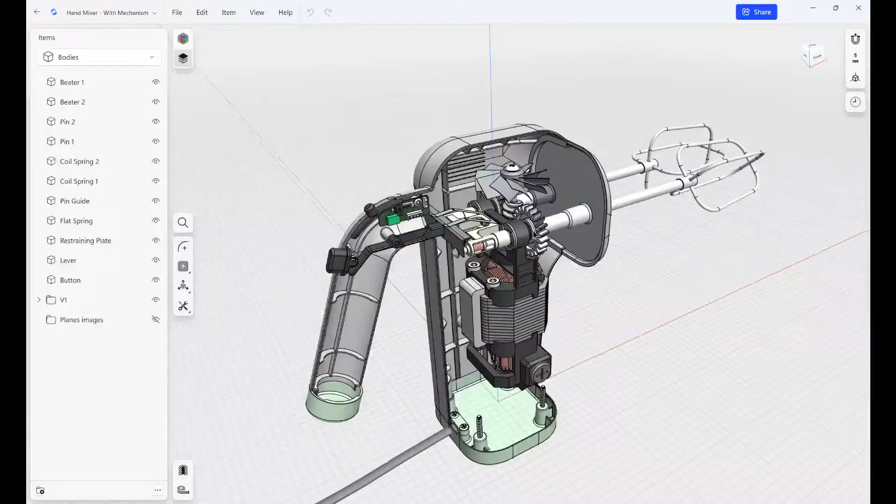So in order to clearly understand what we are doing while modeling, let's start by analyzing the mechanism that we want to create, so it's clear what we are aiming for. So let me just open the hand mixer with mechanism. Okay, here it is. So let's start with creating the section view.

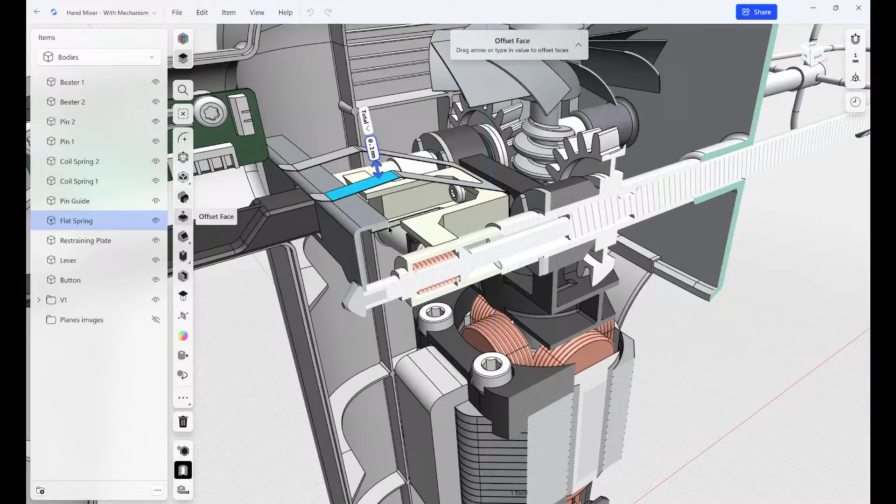Section view is a great feature when you want to inspect internals or when you want to edit something that is hidden by other geometries. So now we can see the internal parts of the mechanism. The parts that are important to us are beaters, pins, springs, pin guide, flat spring, restraining plate, lever, and button.

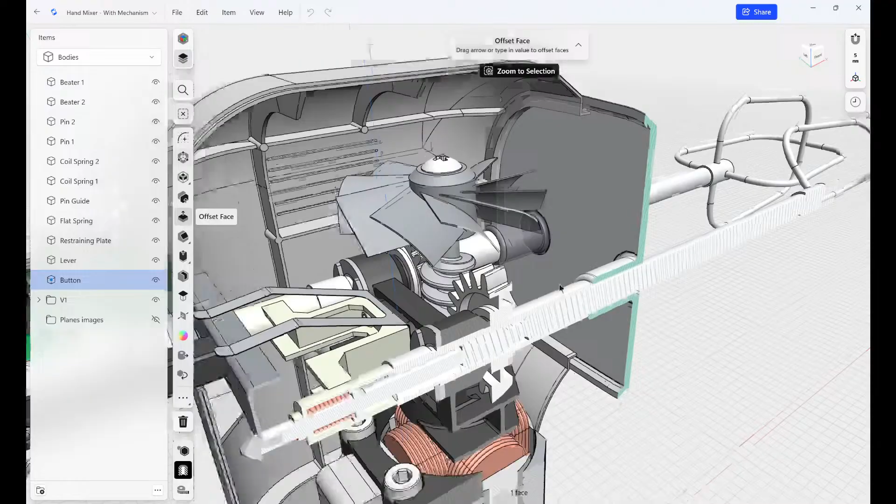And how this mechanism works: when we push the button, it will push the lever, and the lever rotates around the lever point. This will move the restraining plate upward, which will release the pins, and the springs will push the pins towards the right, towards the beaters, and this will push the beaters out. So this is the way this mechanism operates.

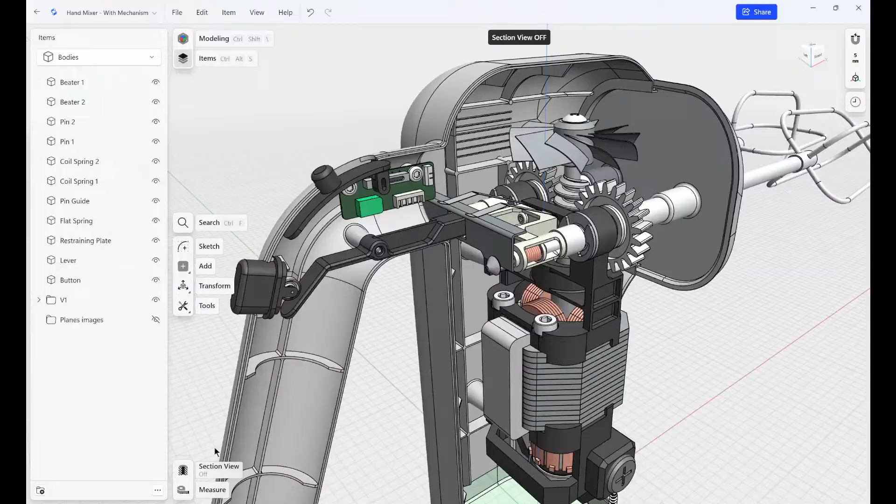And if we push beaters back in, this will push pins towards the left. Then, because of the conical ends, this will raise the restraining plate upward, and this will rotate the lever, and this will act also on the button. So now that we understand how this mechanism works, let's get to the model that is provided in the description, so we can start with the modeling.

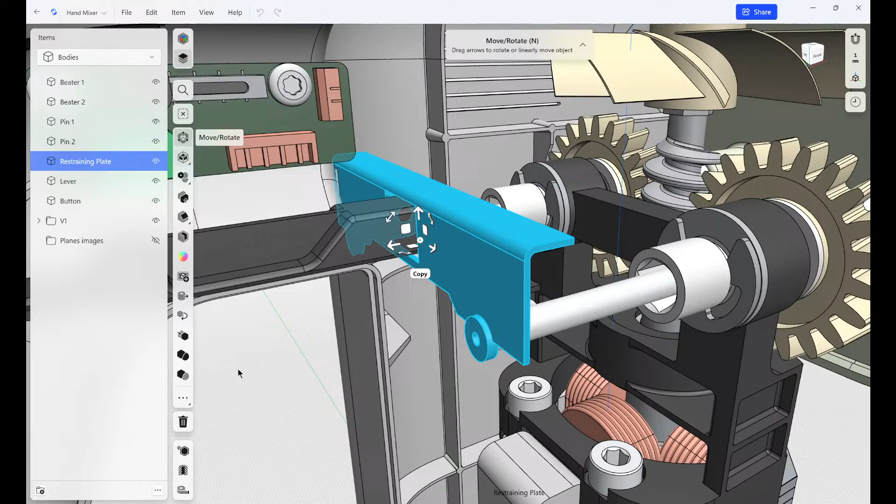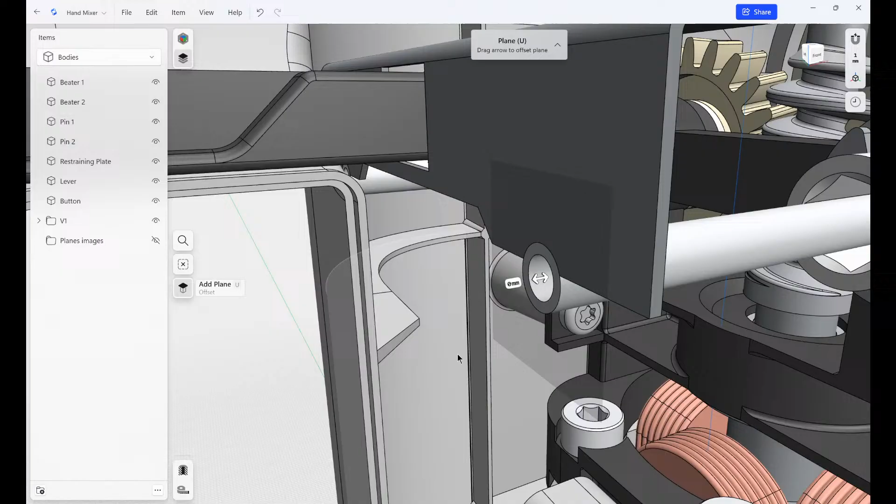Okay, and now we can also see that there are no conical ends, so we need to create them. Let's first create the plane, and let's rotate this plane by 90 degrees. Okay, now I can also create a section view, and I can start sketching on this plane. Let's create some reference lines. And then let's create the profile that we will later use to create conical ends.

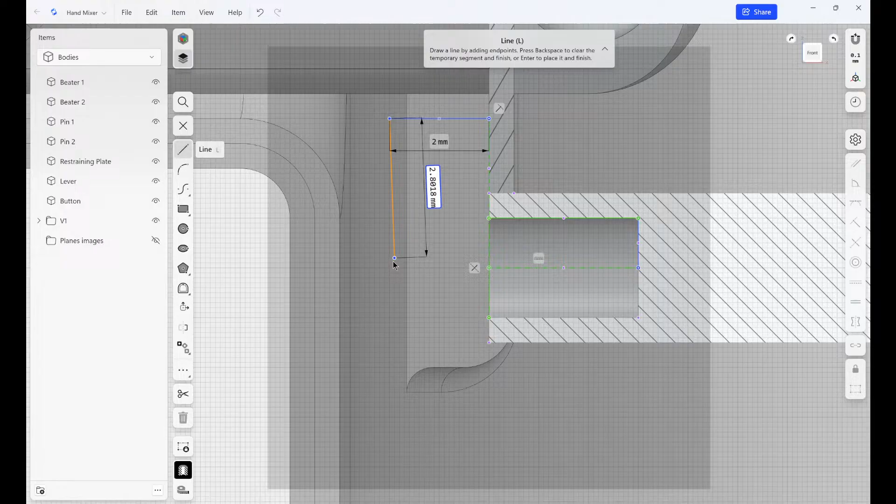With revolve we can easily create this end, and now with a simple feature and direct modeling we can just like that create the conical end. Okay.

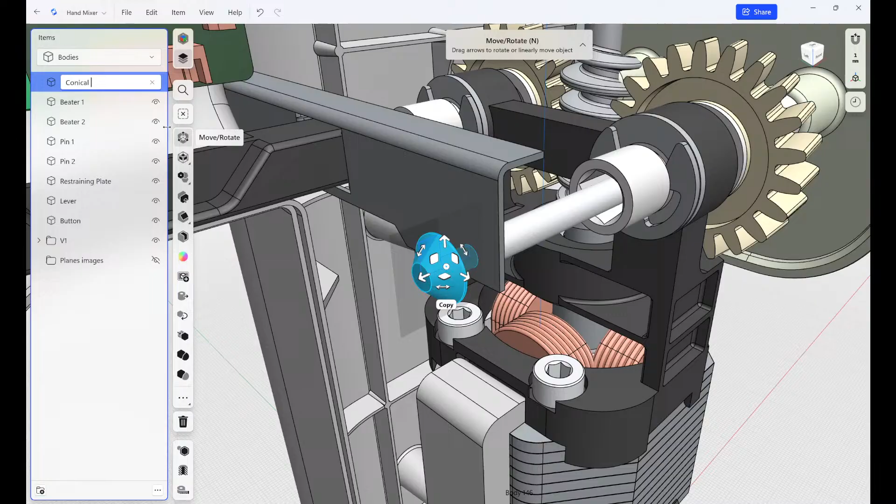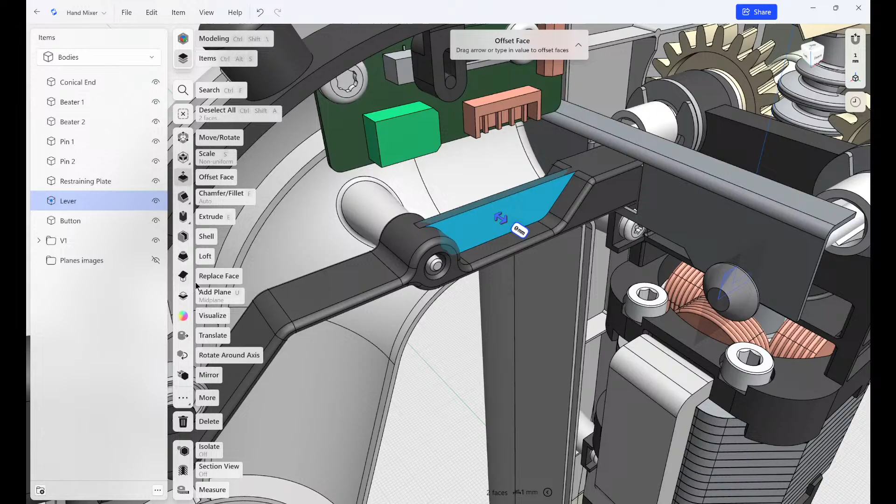Now I can do this also for the other pin, but in order to save some time I'll just use the mirror function and I'll mirror this new part around the middle plane and just like that easily create the copy of this. And for this, sorry about that, we will need to create the mid plane. Just select those two surfaces, add mid plane, and now we can mirror this part. Okay.

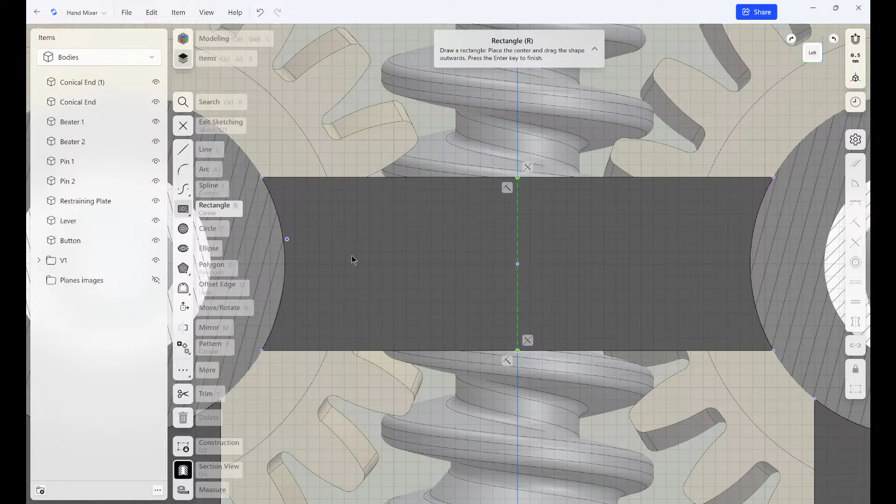Now let's prepare this part of the mixer for the pin guide, which we will create afterwards. So let's create a section view and start a sketch on this surface. Create a line for reference, make it construction, and create a rectangle from the center. Now I want to extrude this by 1 millimeter.

Now you can see that the part that we extruded is not visible, but we can easily fix this by just moving the section view a little bit. Now we can round those edges.

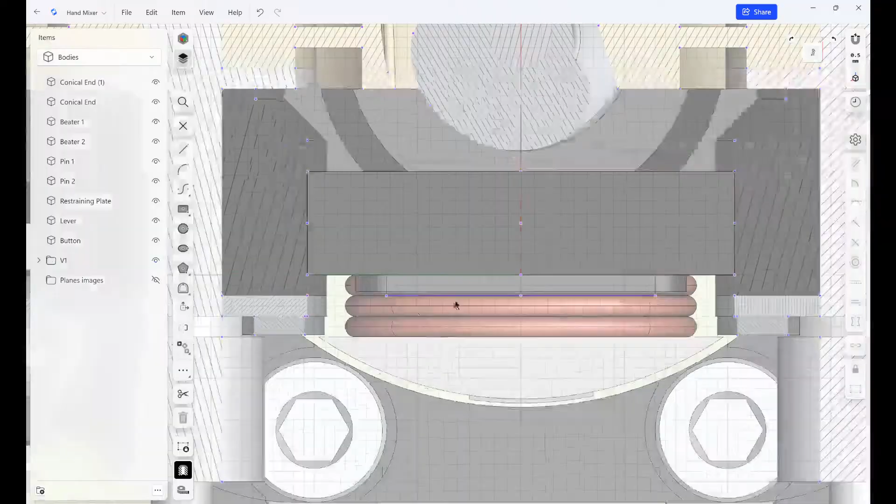And now let's start with designing the pin guide. I'll just project this edge as a reference, make it construction, and also I will create one reference here. And create the profile.

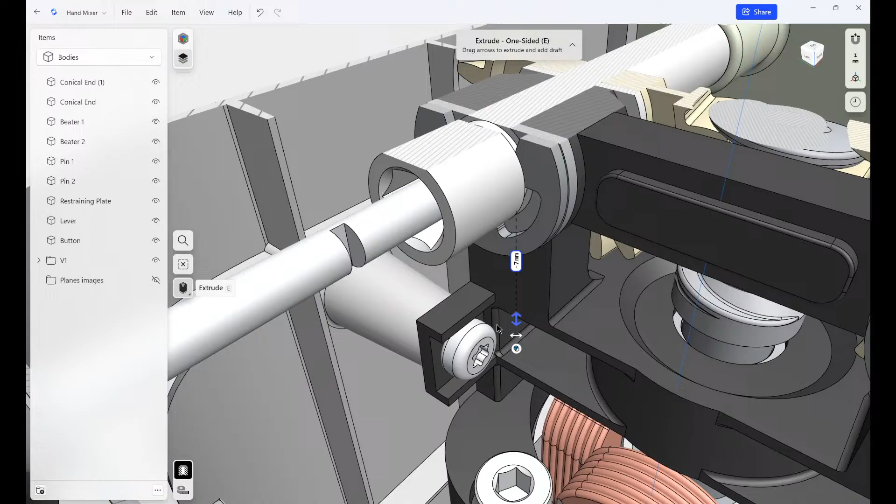Now we can use this profile to create a new part. Okay, I want to adjust it a little bit. Create another sketch.

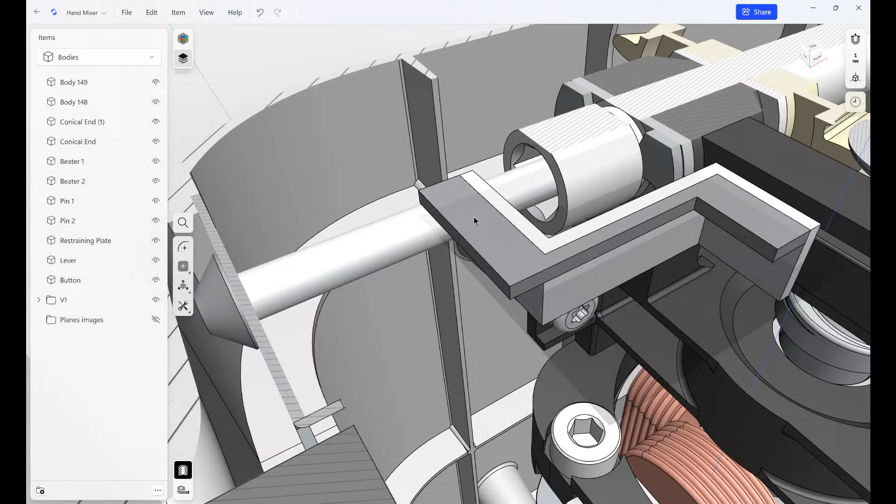And now I want again to mirror this body on the other side of the body we created at the beginning. To use this, the easiest way is to create again the midplane between those two faces, and now mirror this body around this plane. Okay, now we have three different bodies, so let's create one from them with union.

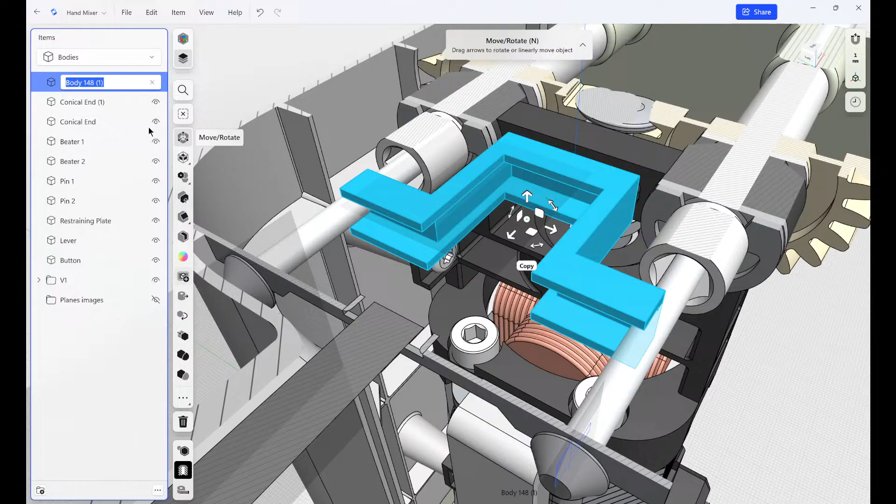Okay, and now because this part is symmetrical, again with mirror feature we can create the other side. Let's rename it. We can hide this plane so it does not obstruct the view.

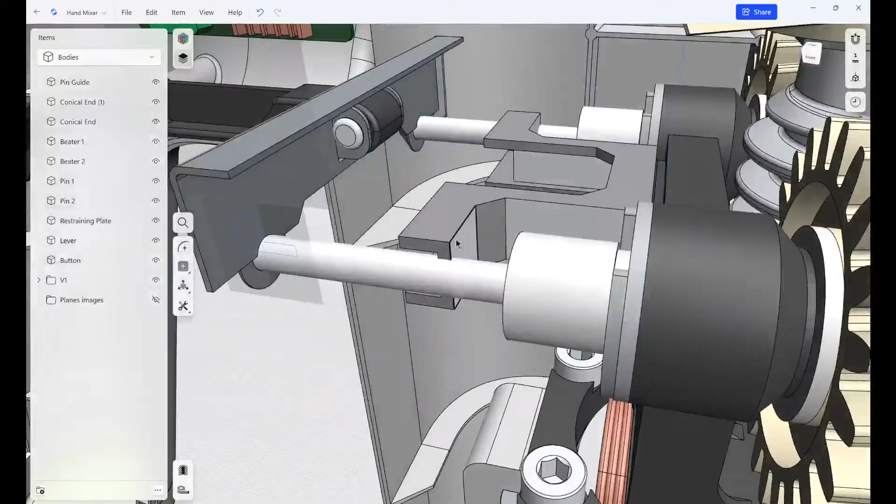Okay, next I will try to create another part of this pin guide. So we will create the section view here and start the sketch. Use the circle.

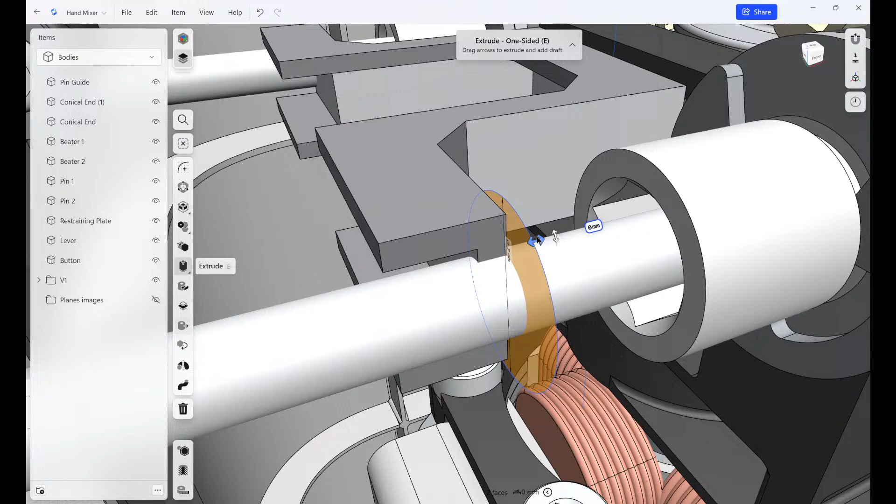Let's just measure what is the distance between those two faces. It's 5 millimeters, so I will extrude this by 5 millimeters, and I want it to be also the new body. Let's extrude it on the other side too. So the total length should be 14 millimeters. Now I want to project this face on this face.

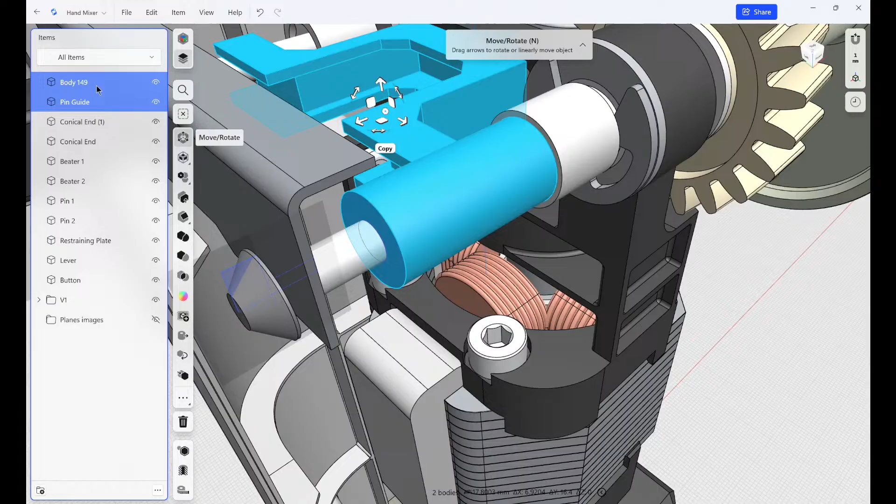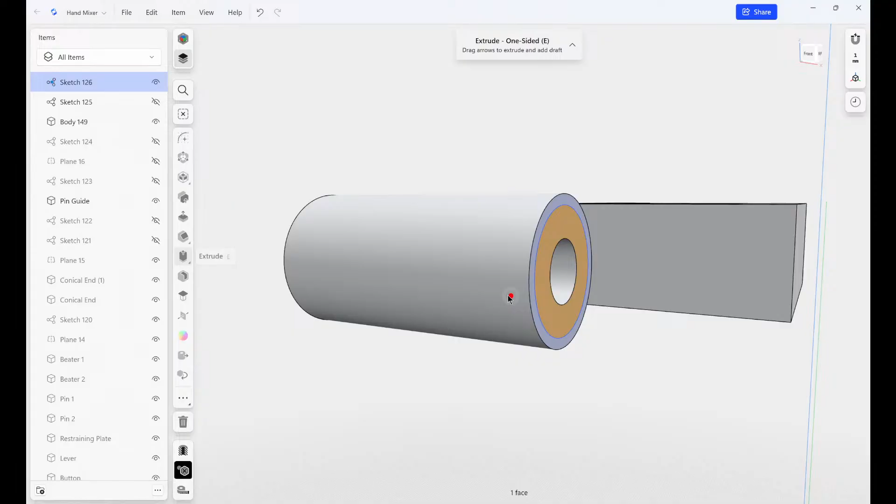Select the things I want to isolate and create the room for the pins. From the other side, I'll use offset edge to create this circle, and now let's just check. It's 14 millimeters. Let's extrude this by 13.5. Something similar we'll do on this side too.

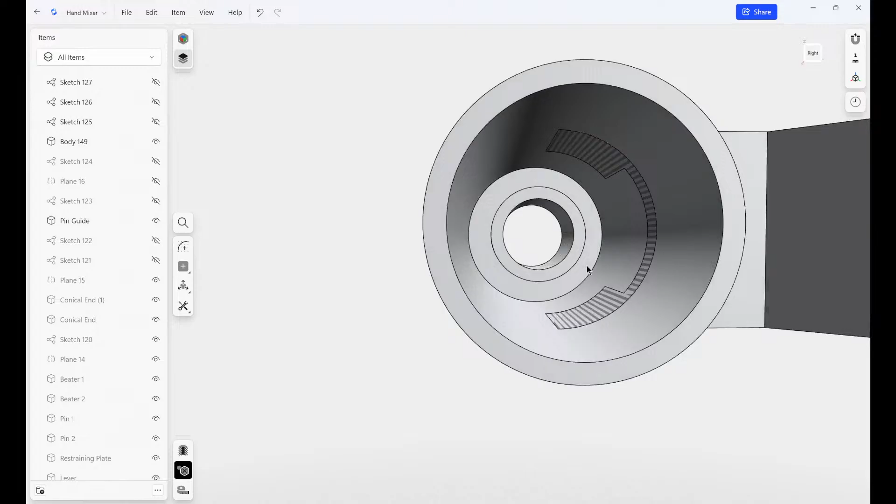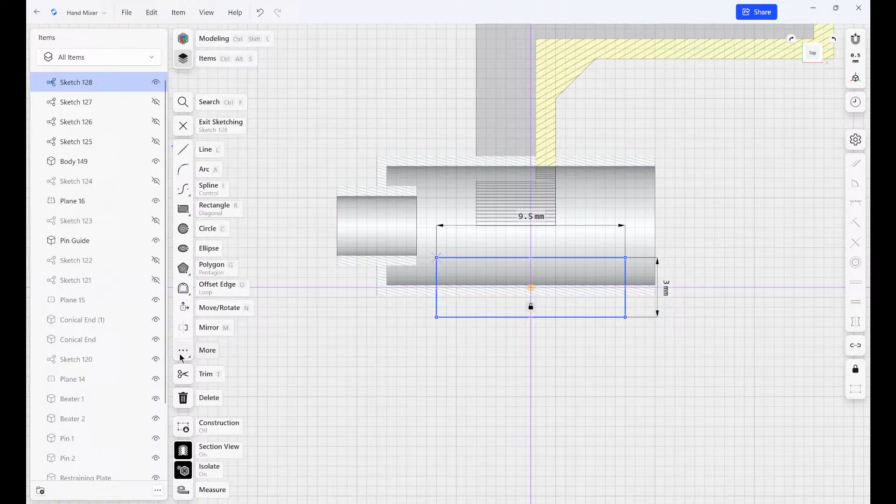And if we look at the other side, now we can see that we created a seat for the springs. Let's turn on the mid plane and turn on the section view. Now those are still two different parts. Now I want to create one rectangle on this, and we also need to create some reference lines so we can define the position of the rectangle.

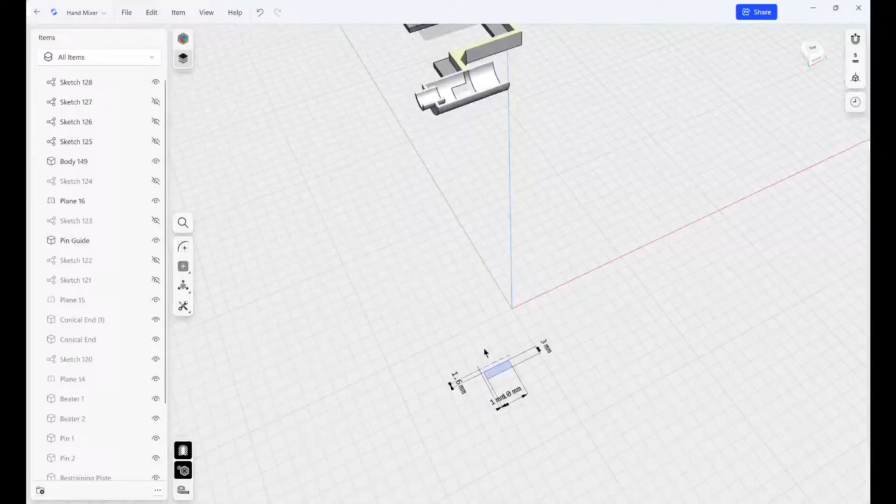Actually that happened by accident, so I accidentally picked the wrong plane to create the drawing, but if this happens, let's just use this trick and project this on this plane. And now we actually avoided creating this sketch again from scratch, and we will turn off the section view, select this projection, and

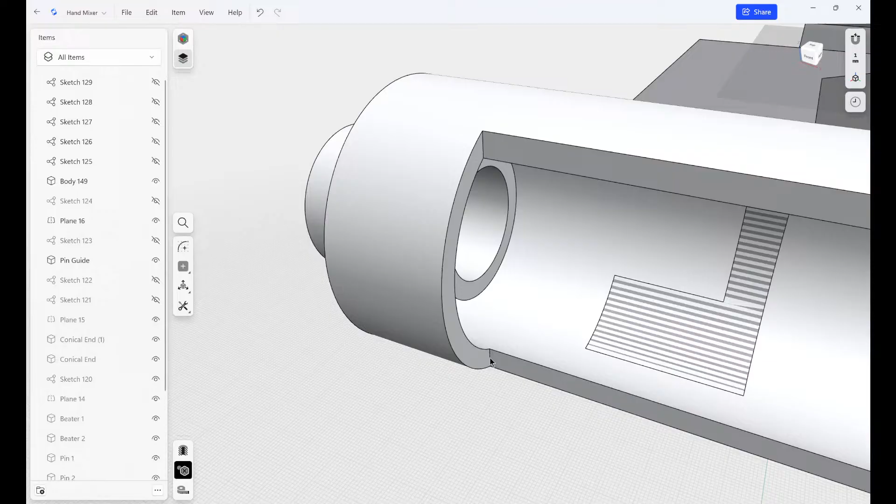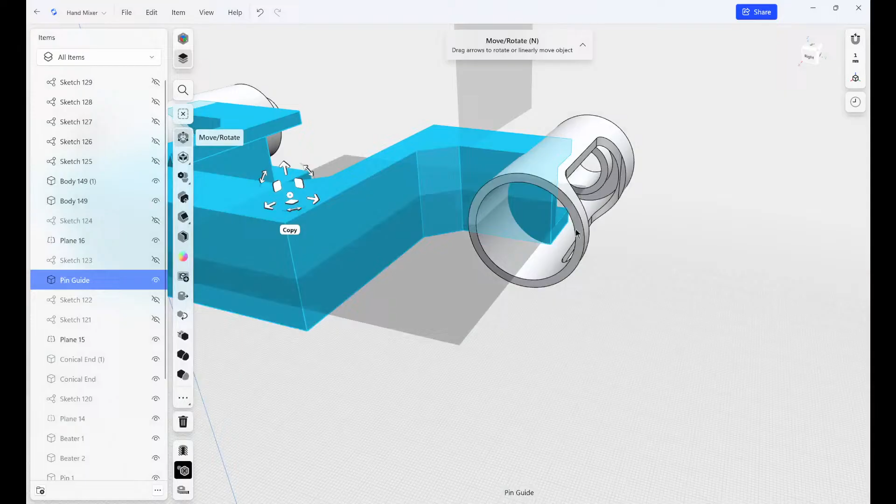okay, now let's round those edges a little bit. Okay, now let's turn on the middle plane that we will use to mirror this body. Okay, and when we look inside this body, we can see that we have something that we should not. So we want to delete this part, but if we delete this part, we will delete this whole body. So we want to divide this body in two different bodies.

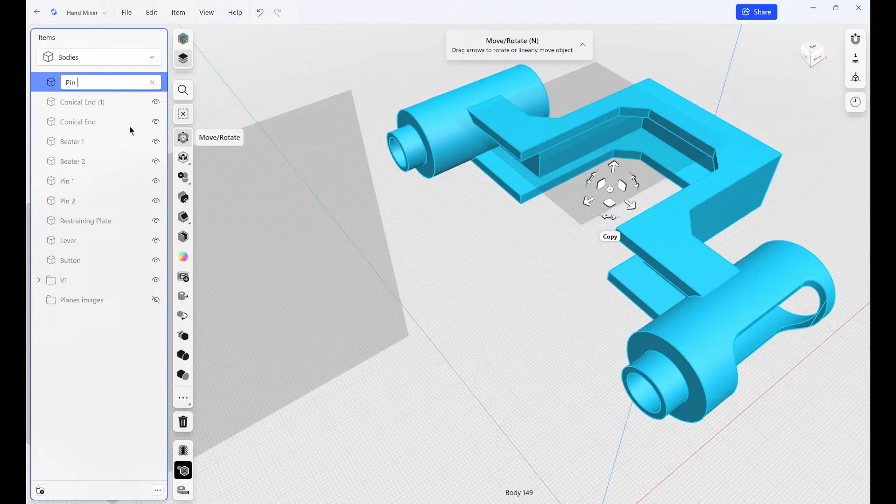So let's select this one and use subtract. And now we also want to keep removed bodies. In this case, remove body because it's only one. And now we can delete this part. And this is our pin guide. Make it one part or one body. Now we can look at the mixer as a whole.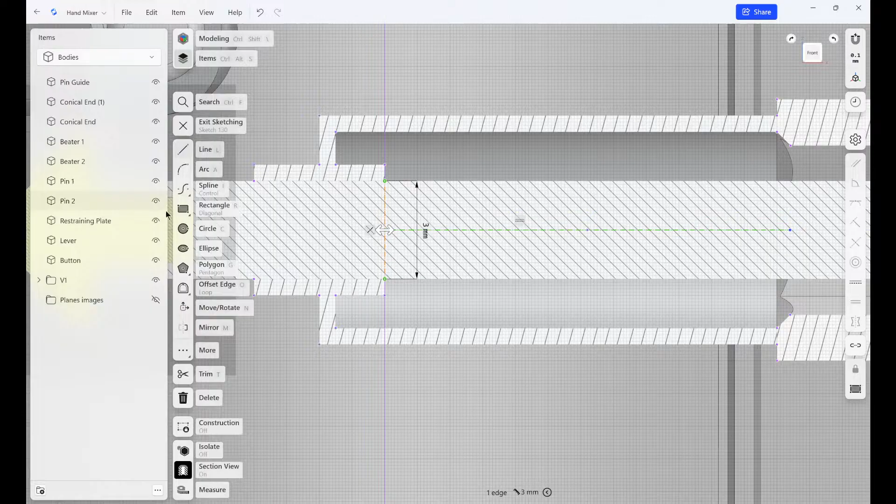Okay, now we need to create springs, coil springs. We will again use this plane, create section view, start sketch, create some reference, and start by creating the circle. Define its position.

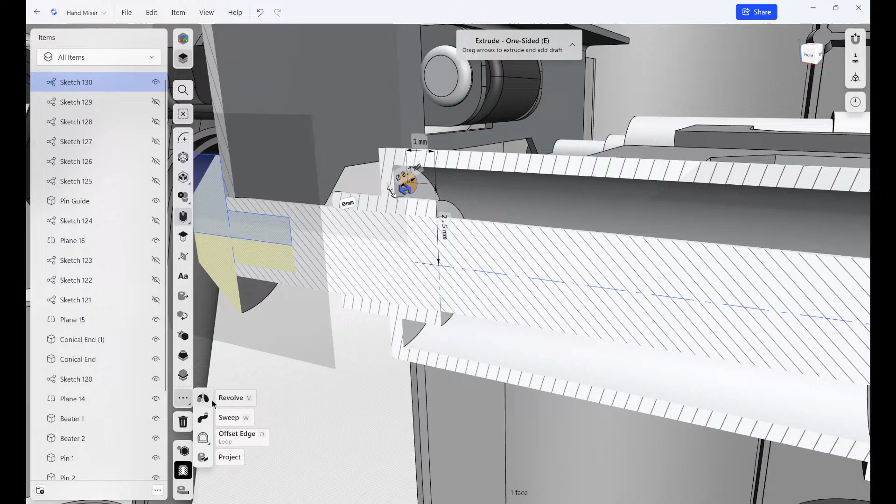And with revolve, we can easily create the spring just like that, and that was easy. Click OK. Now we can go back to the sketch. We will use the same sketch to create another body.

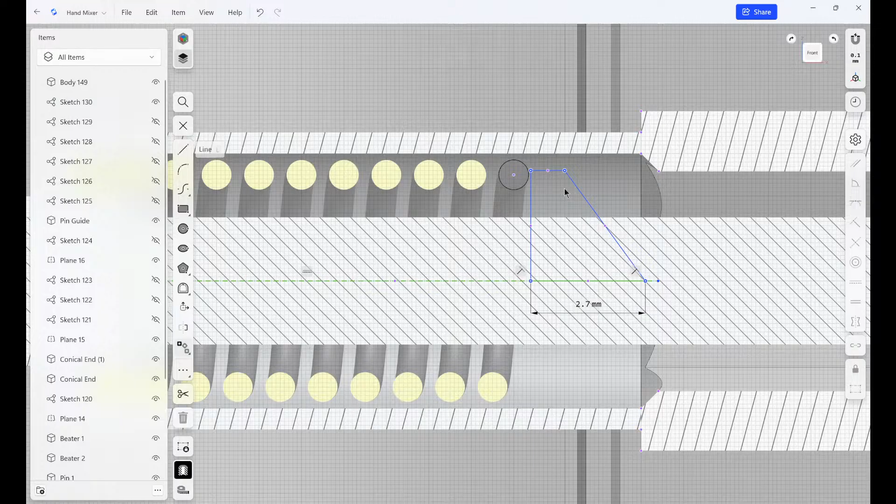Let's make this horizontal, this too, change this to 2.7 and set this angle to 125. Okay, now we can use this profile to rotate it around this axis, and we have another body. Now I want this to be part of the pin, so I'll select both of them and perform union, and now this assembly is done.

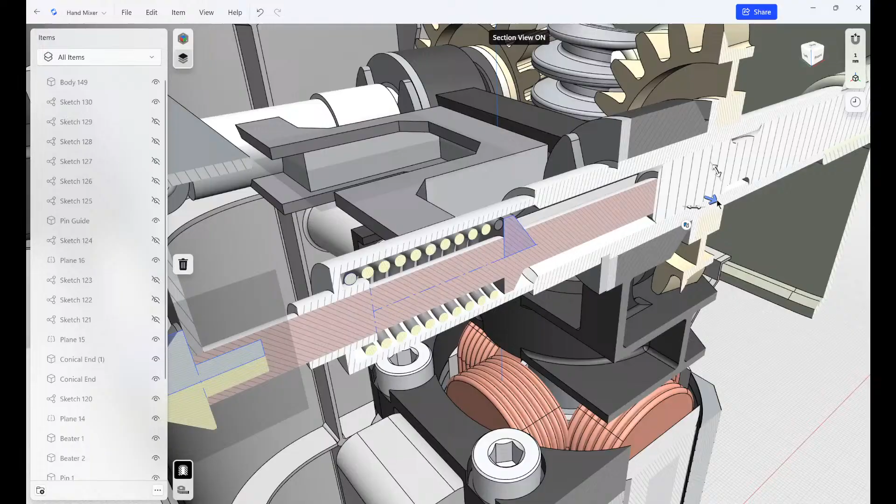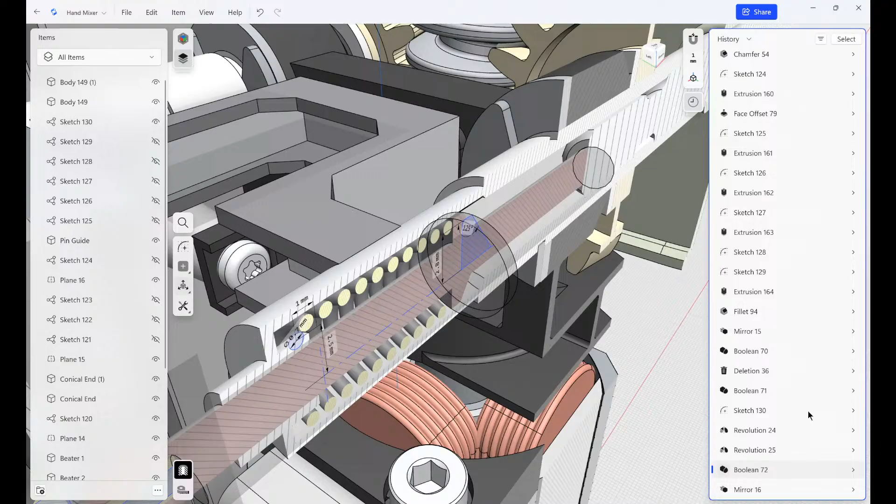But if we want to do this on another pin too, we can easily mirror this spring, and also now I would like to mirror this part, but I already joined it to the pin, so I'll use design history to suppress this feature. Now I can mirror it, press OK, and let's see if this will work.

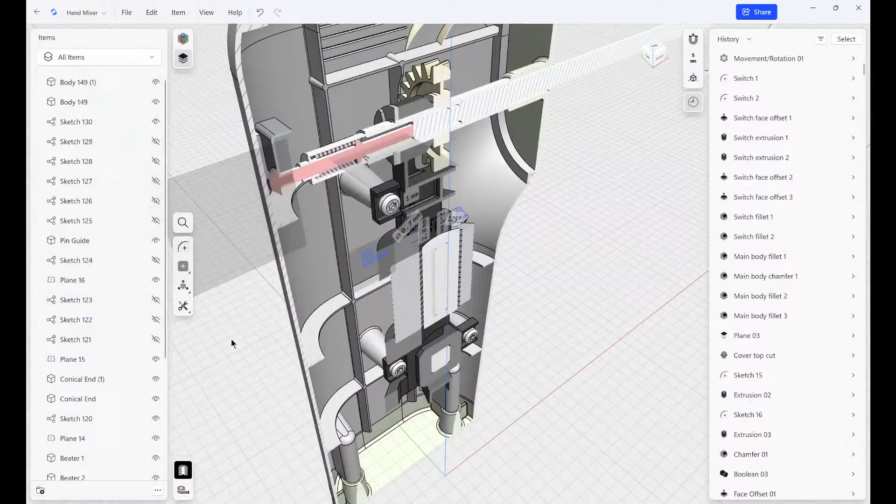And now we have again the one body, and let's see what we have on the other side. We also have this part here, so this was successful, and this is actually almost the whole mechanism. The only thing that I forgot is that I need here a place to insert the flat spring, but I can create space for it very easily.

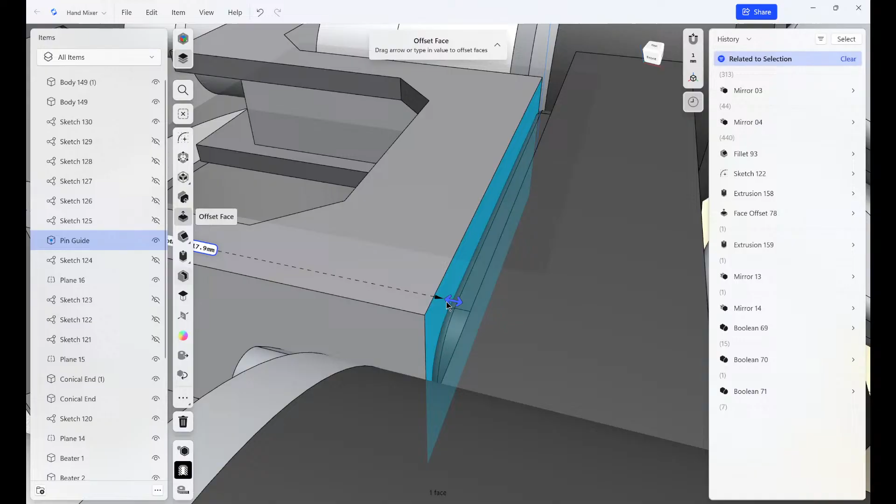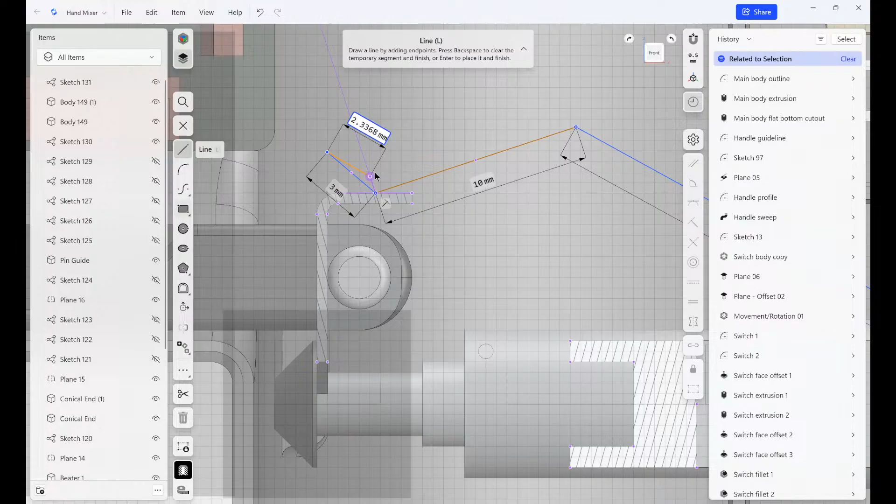I will just select those faces and move them by 0.2 millimeters. Like that. And now let me create a section view here and start sketch. And let's create a profile for the flat spring. We will also need here a reference. Let's define some angles.

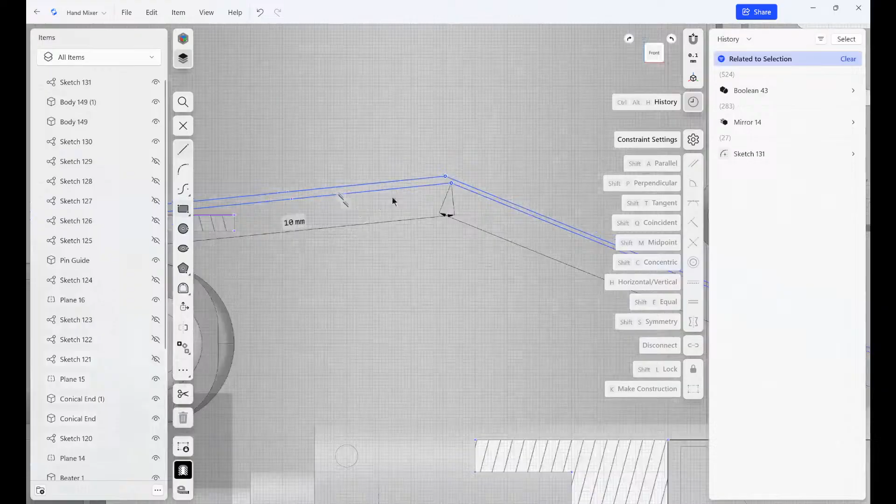All of those lines should be parallel. Okay, now they are. Let's just define distance between them. And there we go. Now we can use this profile to create the spring.

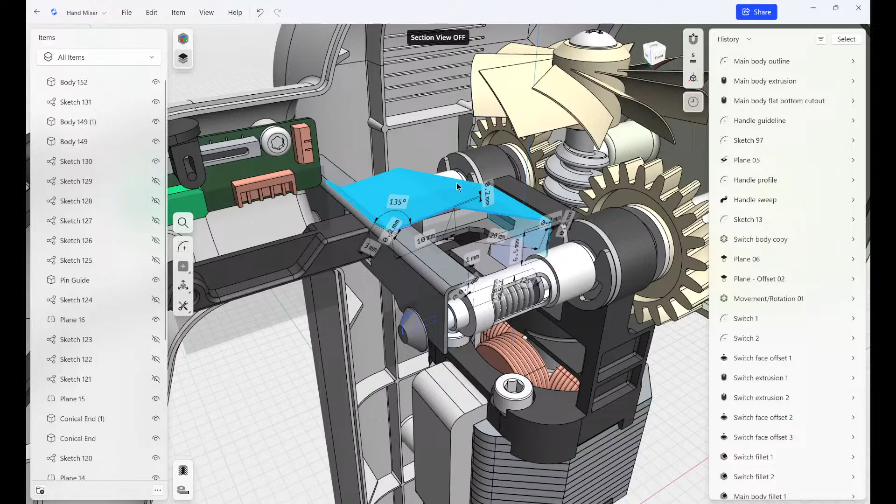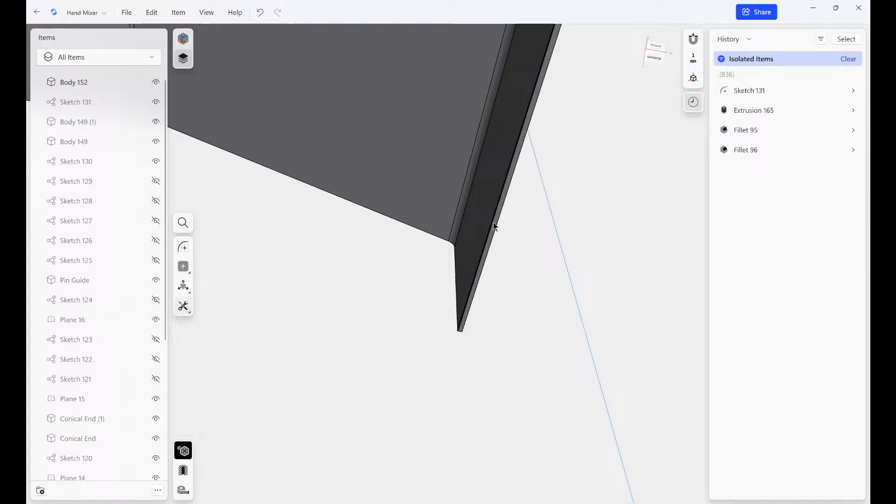And we need to do some adjustments on the spring. We need to round these edges. Keep in mind that those edges are on the outside, so we will use 0.7, but now the inside edges we will use 0.5 because of the thickness of the spring. Okay, and we need one more detail.

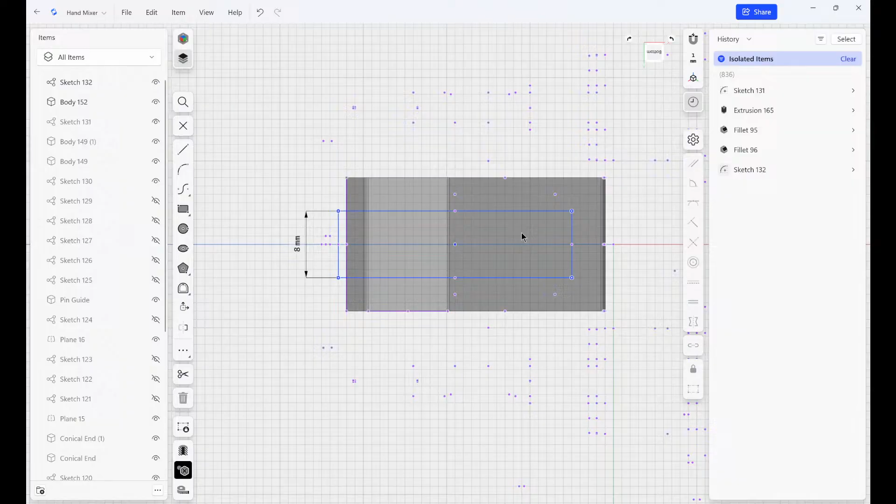We also need some references to define the position of rectangle. And now let's just round these corners.

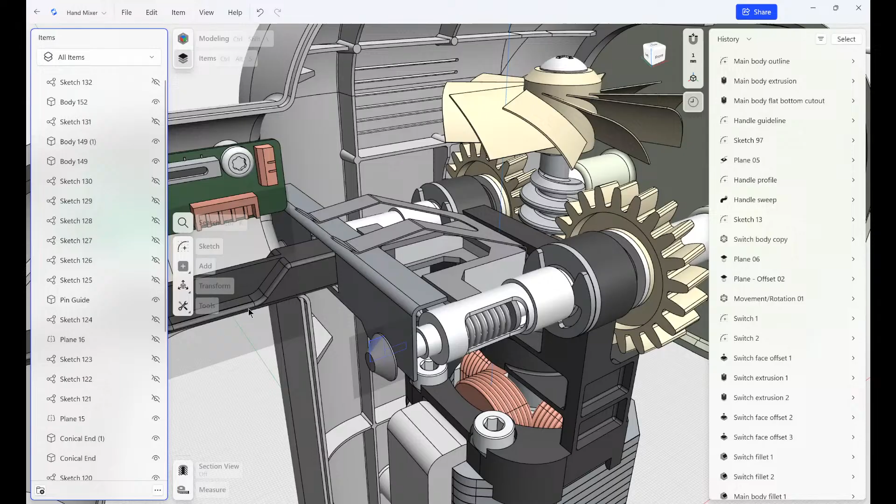And our mechanism is done. Let's just hide those parts that we don't need, not parts but the items, like sketches and planes also. Okay, so here is our mechanism, and now when we are done with modeling, we can start with drawing, creating a technical documentation from this body.

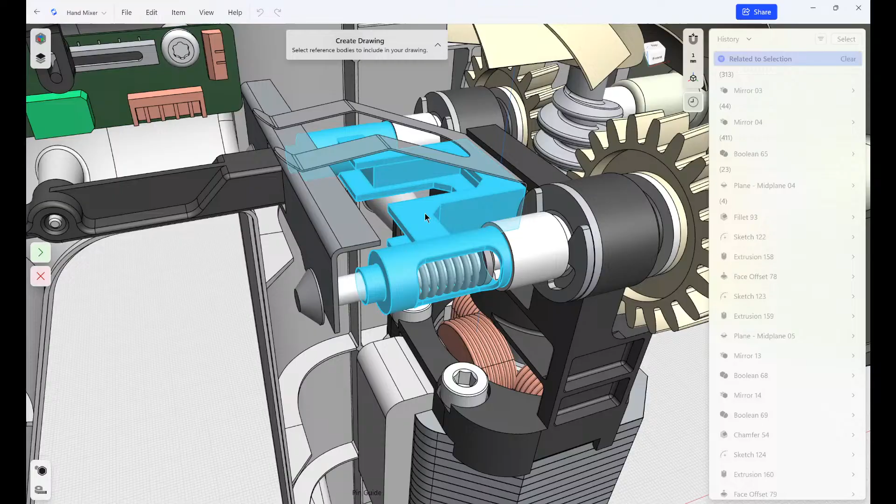So how will we do it? We'll go to this side and we'll just click create drawing. We will pick the body that we want to create drawing for. This is the pin guide. We will click next, and here we can define some preferences. I will choose the portrait orientation, A4 paper, and let's set the scale and continue.

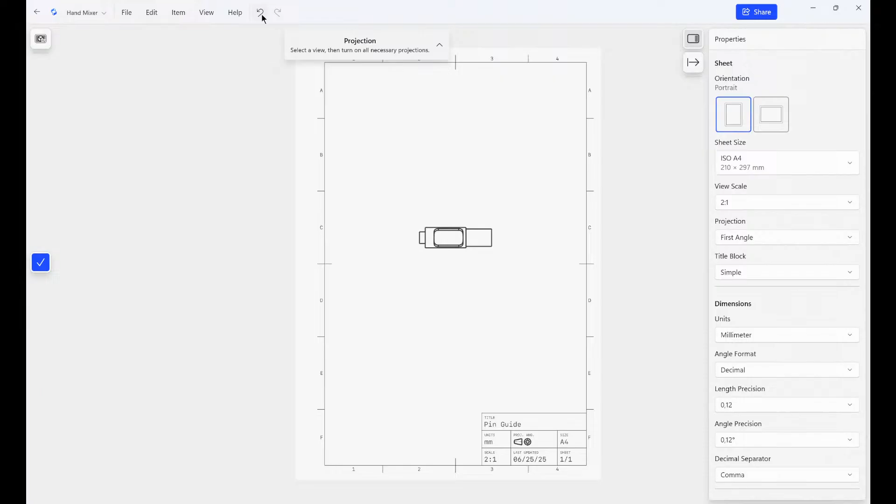And now Shapr3D will suggest you some of the views, but in some cases those views are not something that you are looking for, and if this happens to you, then, sorry about that, then you can click on this option here, front, and now I have also the custom base view option. I will click on custom base view option, and I will just rotate my part, my body, the way I want it to be projected on the paper.

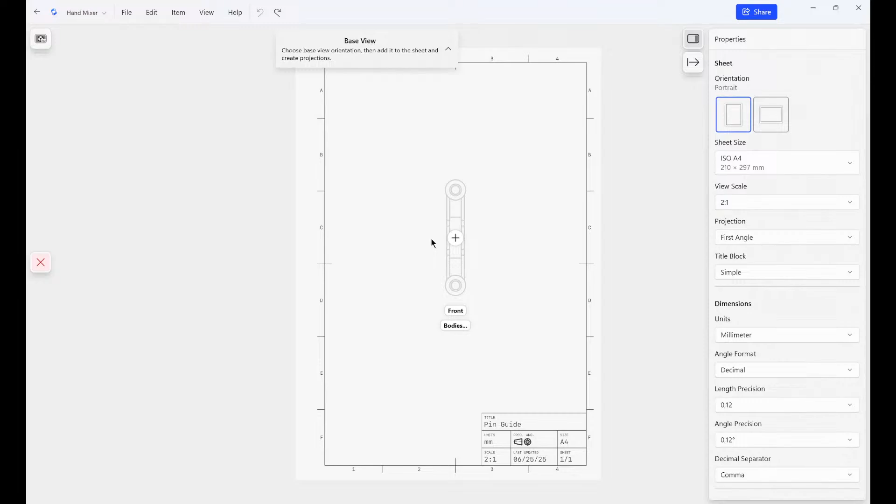So this is the projection I want to be my base view, and here it is. Now from this one I can create another projection, and we can also create isometric projection, so it's easier that way for us to look at which dimensions we are defining. I just want it to be third angle like that, and those three are the three I will go with for now.

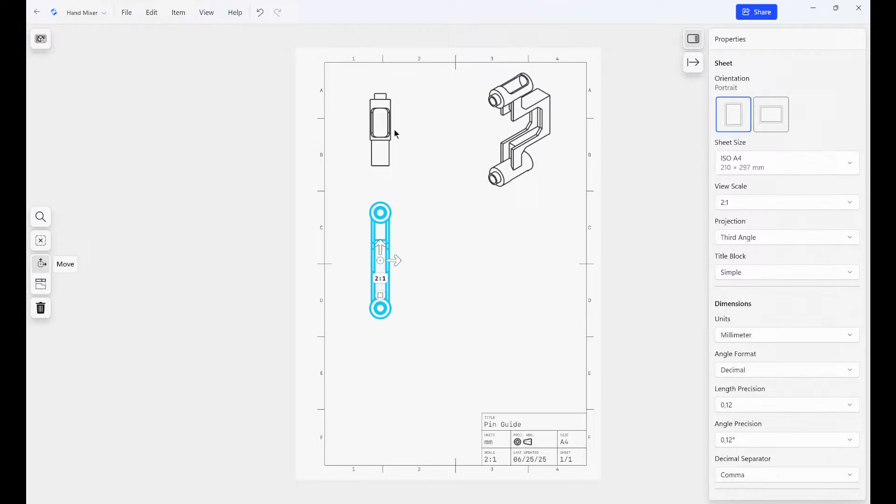You can very easily position them on the paper, but in order to fully define this part, we will also need some section views. We can go to views, select section view, and now create section view. And we will need another section view. This is like that.

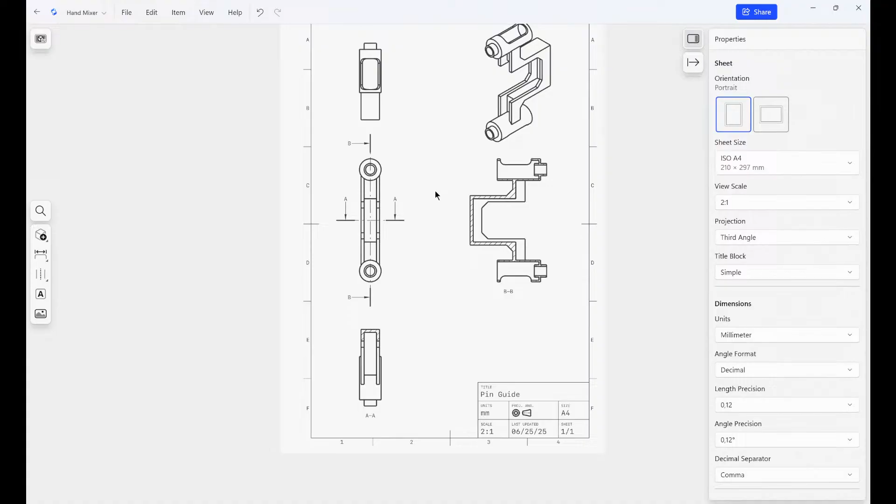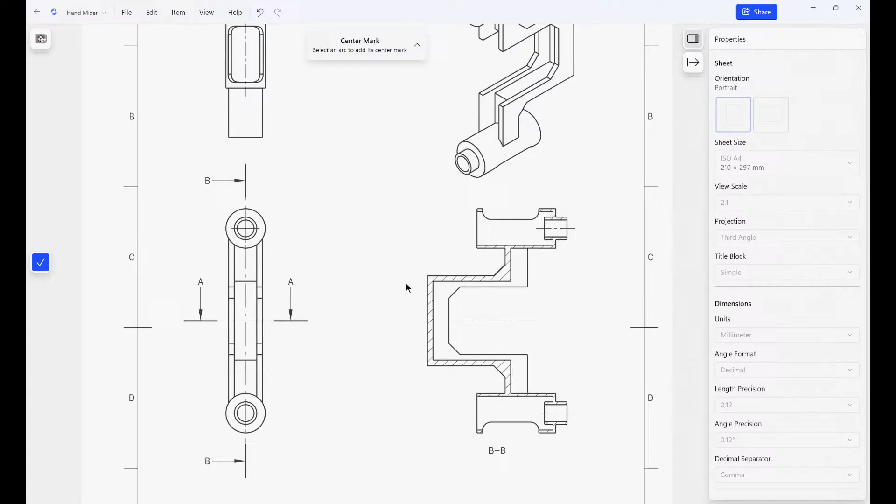And the first thing I want to do is just to select the center mark and do the annotation for the circular projection. Also to add center lines wherever it is needed. And now I see that I forgot to add center mark to these rounds here.

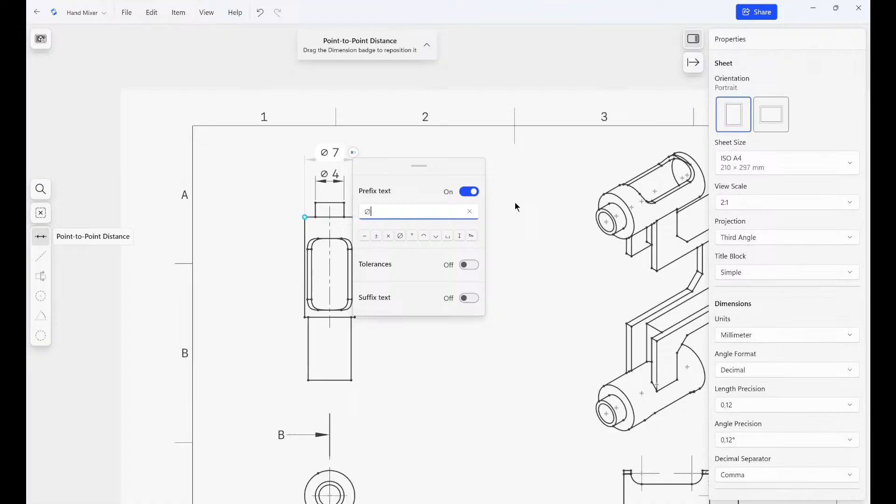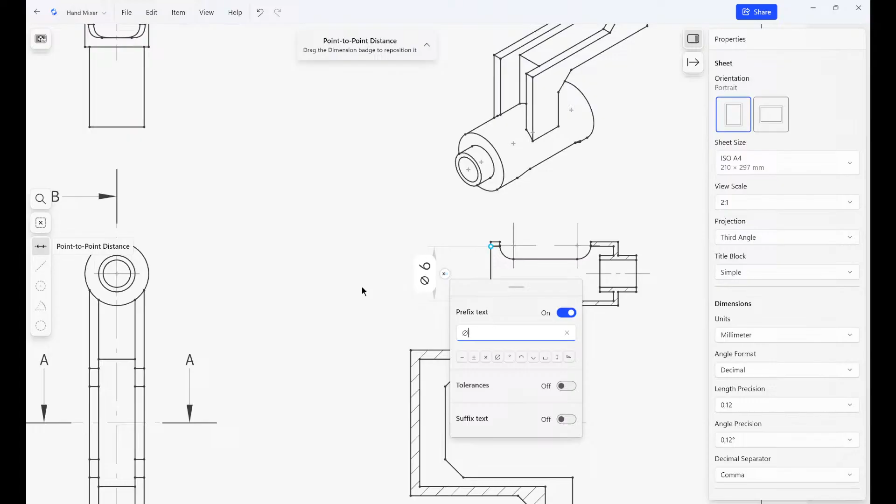And the next step would be to simply add dimensions. This is just some simple annotating.

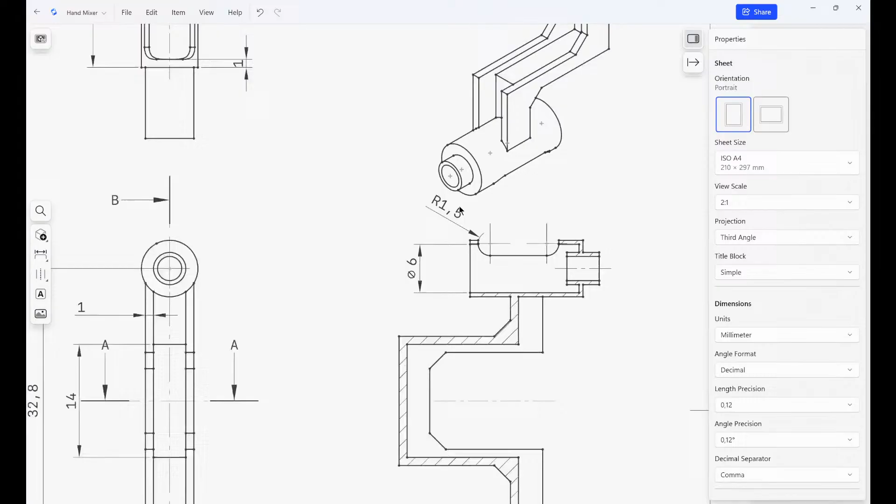So I'm just clicking and Shapr3D automatically recognizes if the line is rounded or the line is any other type. So it chooses this type of annotation. But if you want to define every annotation by yourself, you can find options here. But usually Shapr3D does this very well.

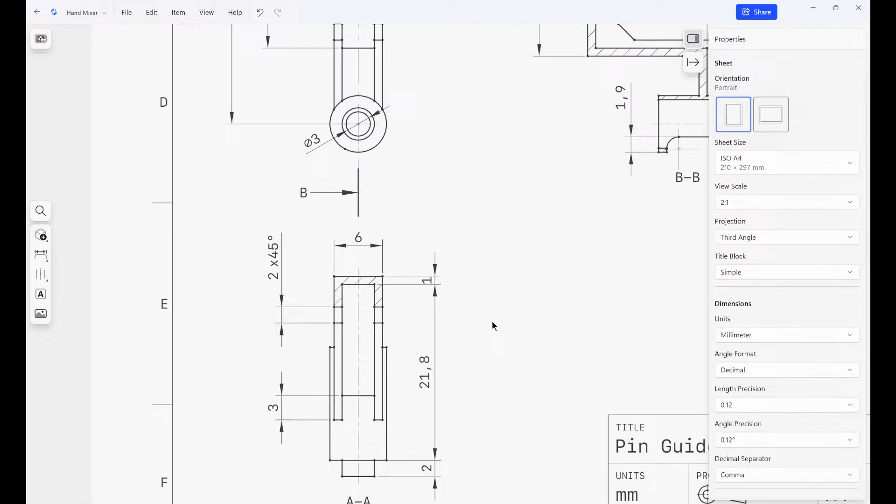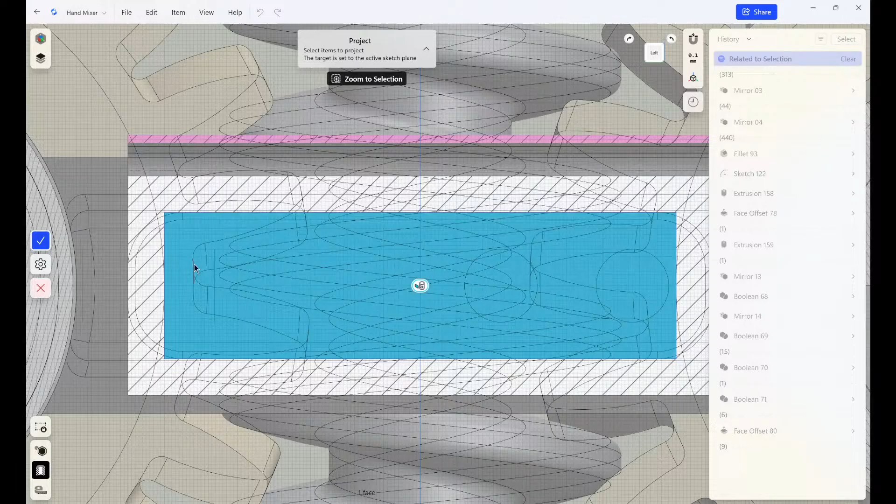And I think that our part is now well defined. But I noticed that I forgot to create holes for the bolts, so we will go back to modeling real quick. Create the section view, start with the sketch and create a projection as a reference and create two circles. And another one.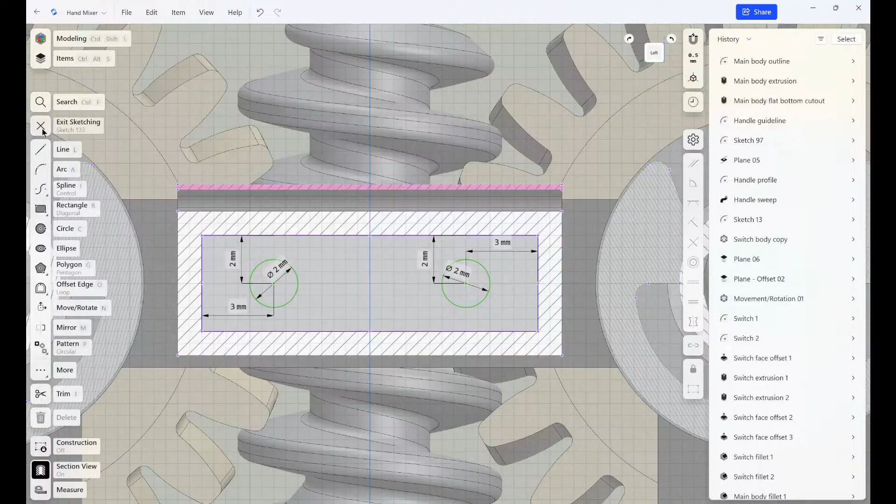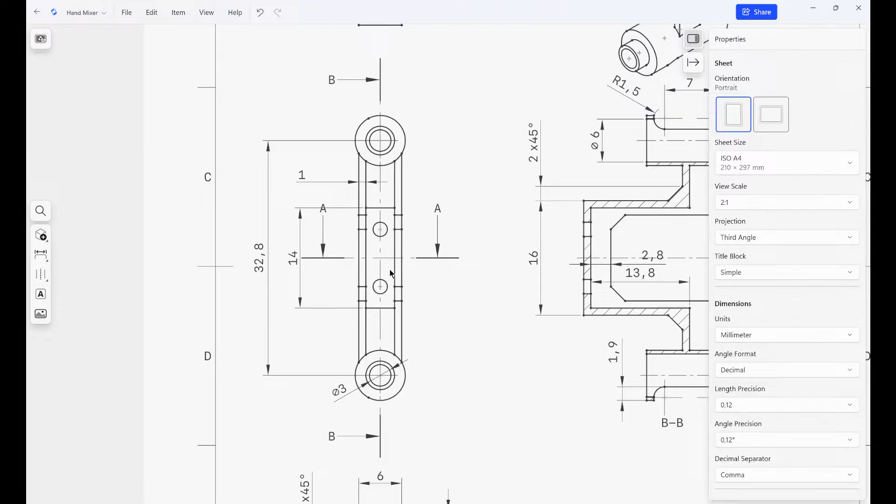We can now select them and use the extrude feature and extrude it by 2 millimeters. Turn off the section view, and now we can go back to drawing, and here we can see the message that drawing is outdated, so we can update it, and immediately there is new geometry, those two holes.

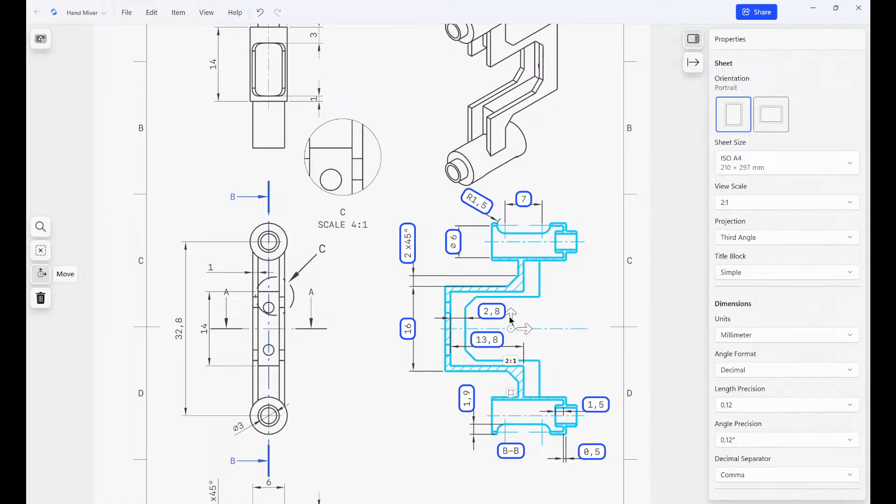And because it's a bit tiny detail, I'll use the detail view. I will create this circle here, click next, and we can place it later to some other place or rearrange it a little bit. So let's move this to the right and to the bottom. And we can add dimensions also on this detail view.

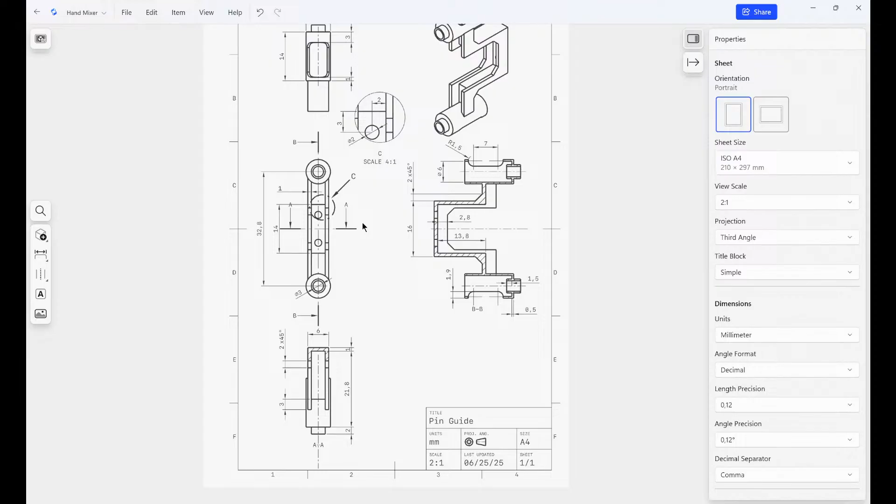Let me just see if I missed something, but I don't think so. Okay, that wraps up the technical drawing, and with that the whole process from analysis to a manufacturable part is complete. So you can take this drawing and forward it to your preferred manufacturer so you can make this part.

And with that we are done with our task today. So thanks a lot for watching. I hope this gave you a clear look at how to approach small mechanical redesigns using Shapr3D, from modeling to a documentation.